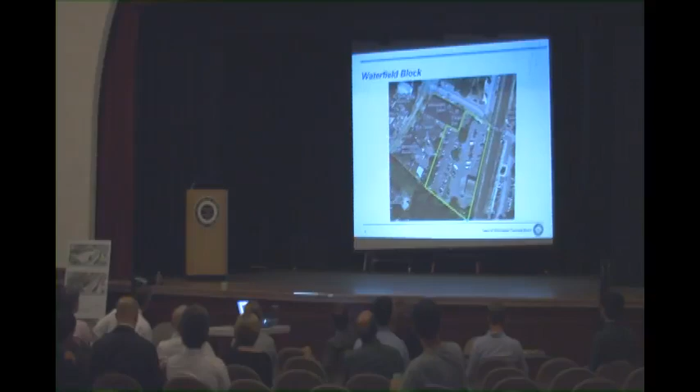So what we are talking about when we say the Waterfield block is the area between the commuter rail station, Waterfield Road, and Church Street. What's outlined in the solid yellow are the publicly owned parking lots. What's in the dotted line are the privately owned stores and properties there. So that's what we mean by the Waterfield block, talking about the whole area indiscriminately.

We have two questions that triggered the work. First, we looked at that area and said, what's the redevelopment potential of the area?

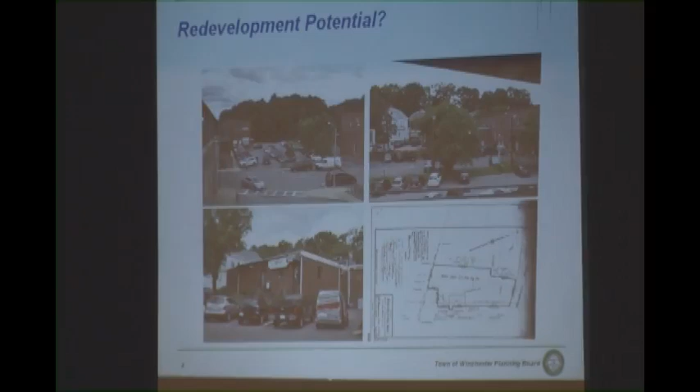As you can see from the shots, and I think most of you are quite familiar with the location, it's a fairly big space. It's been used as a railroad station and a parking lot for many years. On the bottom left it provides access to businesses, to D'Agostino's, the Patisserie, and others along there for their service trucks. But if you look in the upper right carefully, you'll notice it's not a terribly well-used space. There's a lot of unused space, a lot of inaccessible locations, and it's pretty underdeveloped. So if you're asking where in Winchester Town Center you can find a reasonably sizable parcel to think about redeveloping, this is certainly a target to begin with.

It's also an interesting site. Our town planner staff dug back into the records and found there's a 30-inch or so MWRA regional sewer that runs through there in the bottom right. The architects will point this out later on some of the drawings. So there's a very large sewer - you can't easily build directly on top of it.

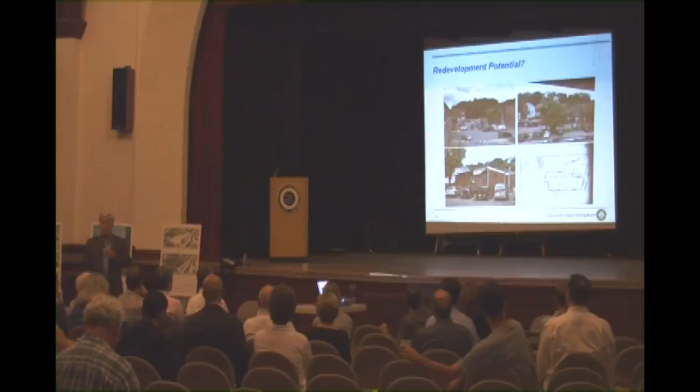So one question is, what's the redevelopment potential of this area? The second question we had was, what do we want in this area in relation to the reconstruction of the MBTA commuter rail station? The MBTA is committed to reconstructing the station - the platforms and ramps are sort of failing, and they're going to reconstruct both of those.

Their current plan is to reconstruct it pretty much as is, where it is - the ramps will be longer and at different angles. But the question they were asking us is, if we want to do anything else, want different access, or want to move the ramps, particularly in the Waterfield area, we need to tell them sooner rather than later.

The other thing that would make a difference is that the building in the lower right, which used to be the train station and now houses the Chamber of Commerce - I think David Anderson called it a marvelous example of mid-century architecture - is going to come down as part of the station reconstruction. And that will open up space there and change the configuration of the area.

So again, the question for us is, what's the redevelopment potential? And if we want to do anything - change access to the station, change anything there - we have to tell them sooner rather than later. So those two questions are driving part of tonight's discussion.

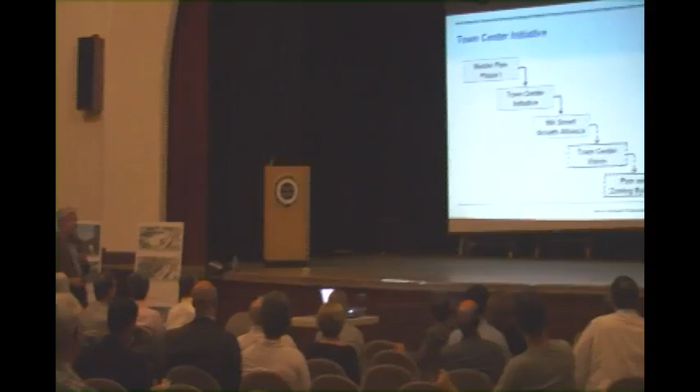A bit on how we got here: we did a phase one master plan that looked at the town a few years ago. One consistent theme we heard was that the town center needed some attention. We heard that the zoning was outdated, that the development process was Byzantine and time-consuming, that parking was a mess, and that floodplain litigation issues were inhibiting people from even thinking about developing. That triggered the Town Center Initiative.

We put together a series of efforts to take a look at the town center. We were fortunate to capture a technical assistance grant from the Massachusetts Smart Growth Alliance for their Great Neighborhoods program - Ian Anderson is here tonight to represent that. We've used that money over the last 6 to 9 months to look at some foundation issues: a review of the zoning, a review of the housing market in the area, and a review of the economics. So we put together a series of building blocks, and the next step was to ask, what is your vision for the town center?

How do you want the town center to change, if at all, in the future? And then translate that into a plan that changes the zoning bylaws. Right now, many things you might want to do cannot be done, because the zoning caps the height or makes it impossible, or requires a shopping mall of parking around any building to qualify for the parking standards.

So the question was, how are we going to get there? When we began looking at the whole problem, it felt intangible just to sit and look at a map of the town center and ask, what do you want to do? So we said, why don't we develop some case studies and look at specific blocks to give it a tangible sense of what we could do.

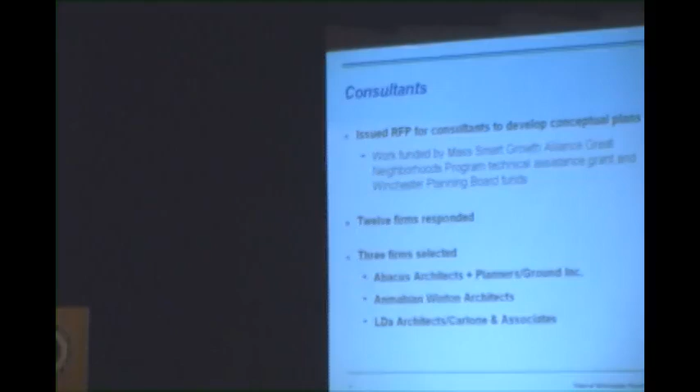So we put out an RFP a couple months ago for consultants to help us develop this. It was funded through the Great Neighborhoods Program technical assistance money and some of the planning board's funds. We had 12 firms respond, all quite qualified — we were lucky to get that response. We selected three; they're here tonight, including Abacus and LDa Architects. I'll introduce them shortly. What we did was give them something like this as the rules of the game.

We said, start with a blank slate as much as you can. There's no existing plan, and assume there are no zoning restrictions, since we'd basically rewrite the zoning at some point to do this. So don't be constrained by what's on the ground today.

Also, we don't have any specified development program for how much retail or housing you have to put in. We said you should consider a mix of uses — retail, restaurant, office, housing, public space, and so on. We basically told them to use their imagination, experience, and best professional judgment to put in what they think might work.

We asked them to make sure the concepts included the entire block, not just the town-owned portions — most of them looked at the entire area. We asked them to address access to the commuter rail station, which was one of the critical questions we had. We also had to be aware of and maintain clearance over the MWRA sewer line, since that would be a showstopper for building there.

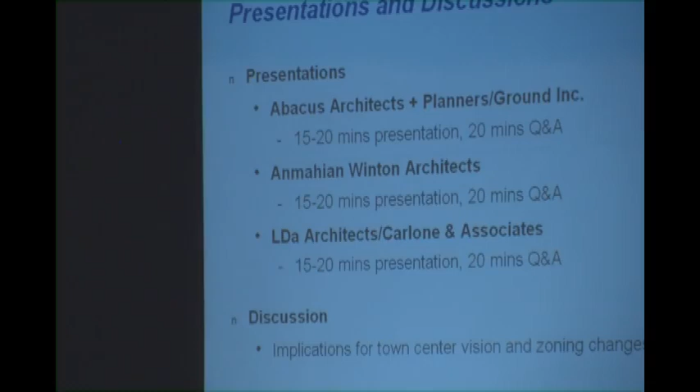So for this evening, we cleverly organized the presenters in alphabetical order. We're going to ask each one to work through their presentation, giving everybody 15 to 20 minutes, and leave about 20 minutes for you to ask them questions.

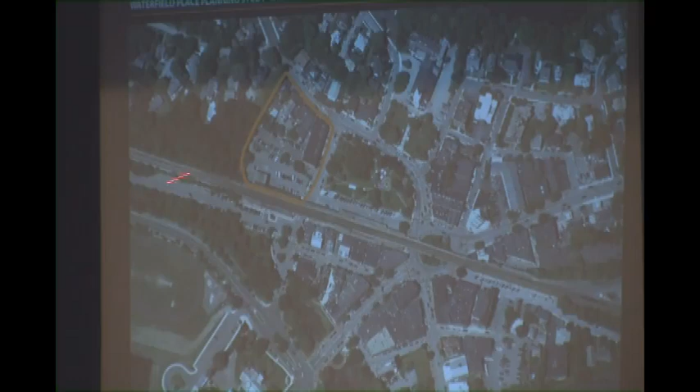Now I'm going to start out by disorienting everybody. Here's the site, oriented in a different way. Here are the railroad tracks on the bottom, here's the common, here's town center and the rotary, and so here's our site. Here's the playing field. All of our plan images will be in the same orientation, so if you can orient yourselves just a little bit.

Wonderful site, right between the residential neighborhood and the common, right near the town, right next to the train station, right plugged up against the Great Wall. So there's both challenges and opportunities. As we looked at the site, as Lance mentioned, it seems underutilized given how great this location is. There's some really nice stores and buildings here, but, you know, parking lot.

We looked at this with a broad brush and said, suppose all of these buildings disappeared, suppose we started with a blank slate. We need to bring back the retail, we need to bring back all the great things that are already there, but potentially in a new form. There are a couple of historic buildings there that could conceivably be saved, and we understand they're important to the town, but for the moment we said, let's see what happens when those are removed.

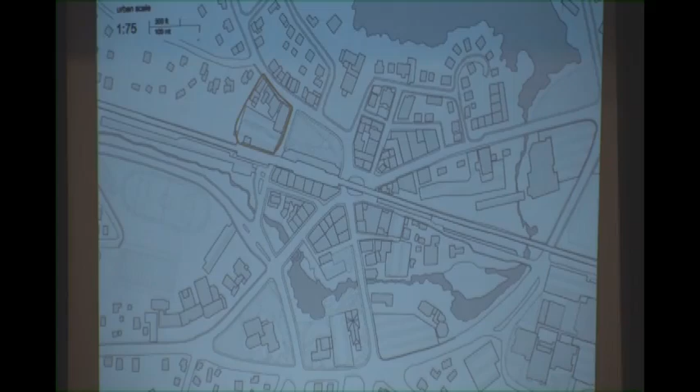And you can see this in the larger context of the river and the water. I'm going to turn this over to Shauna, who's going to talk about some of the broad issues that we wanted to deal with.

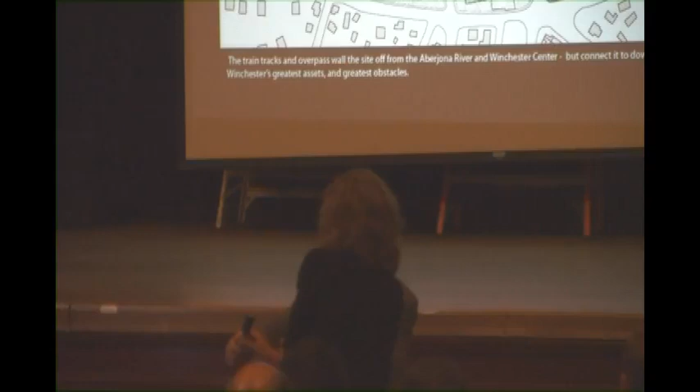As David mentioned, I'm really just going to go through a few broader ideas and observations about the town to set the framework that we started to look at this project from. The first is that it's a lovely, lovely downtown. I live in Arlington, actually, and spend quite a bit of time in the Fells, so I drive or ride through Winchester quite frequently. But one of the things that's always striking and somewhat confusing is it's a beautiful urban fabric, and then you hold your breath, dive underneath the wall, and on the other side, it's a beautiful urban fabric.

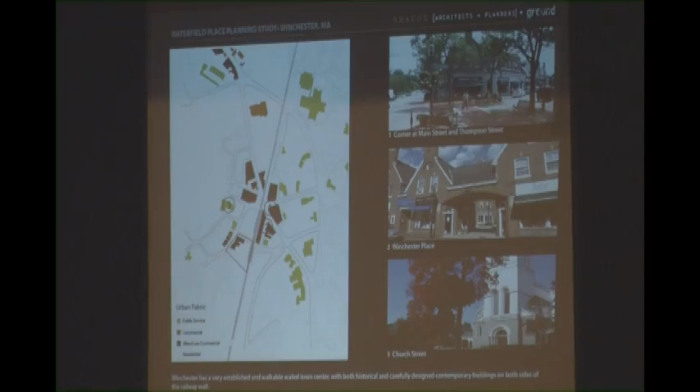One of the things that we looked at very closely are different ways to address that condition. There's clearly benefits to having the railway wall. Not only does it provide the opportunity for transit-oriented development, it allows people to get downtown or out of the city without having to use their cars, cuts down on vehicular traffic. But there's also other possibilities.

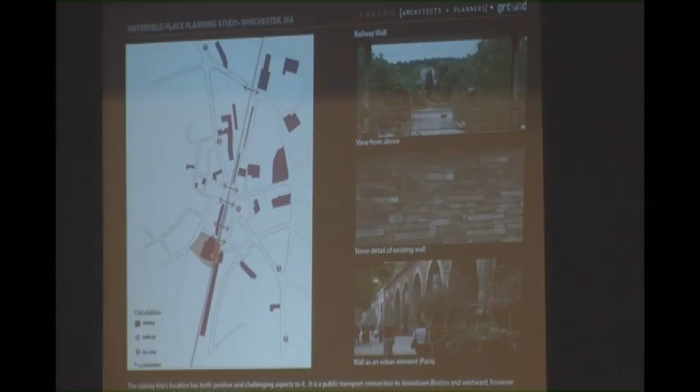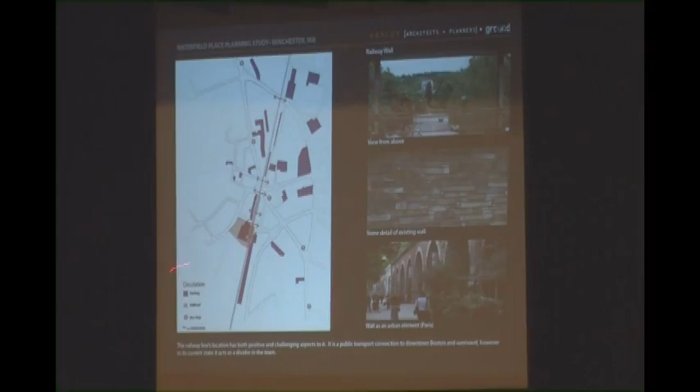The top slide is showing views from the railway platform itself. The second slide shows the exquisite quality of the stone of the project. On the bottom is a slide from another project, showing how infrastructure such as this, historic infrastructure, can really be integrated into the character of the town and the city. So both pros and cons, and as you can see with the arrows, the goal of this project is about connections to the larger realm, but primarily connections within the town itself.

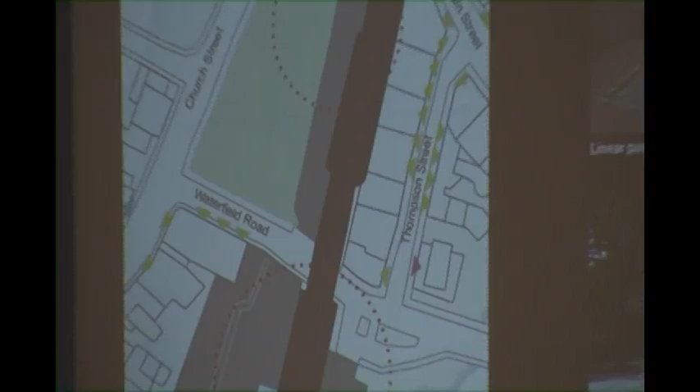Now I mentioned the pros and possibilities of the railway connection, but in a larger framework, the gap, the barrier that the wall creates is actually doubled in many instances by the location of the parking, making it kind of an untouchable zone. So instead of being this wide, it actually becomes this wide, and it becomes something that isn't really tied to the city.

So another of the big picture ideas we were looking at was ways to integrate this railway wall, which is actually an incredibly beautiful piece of infrastructure. How can we tie that into the city, into the town?

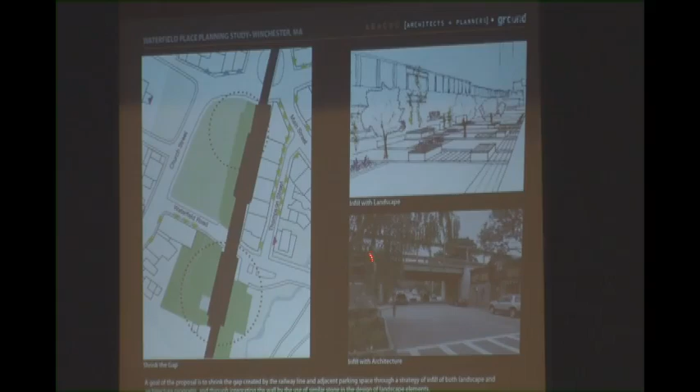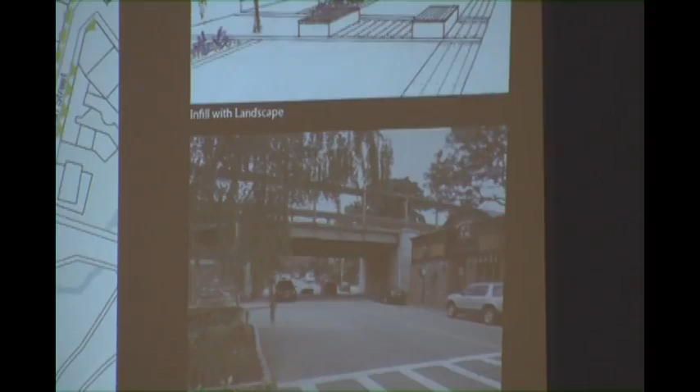In some cases, it's about bringing the architecture right up into a comfortable adjacency with the railway structure. But in other cases, it may be extending the landscape, for example extending the character of the common, and using that stone as a springboard for the character of the landscape, the benches or the paving, or even touches of stone cladding on the buildings being built around. So really trying to build upon something that could further enhance the quality of the town.

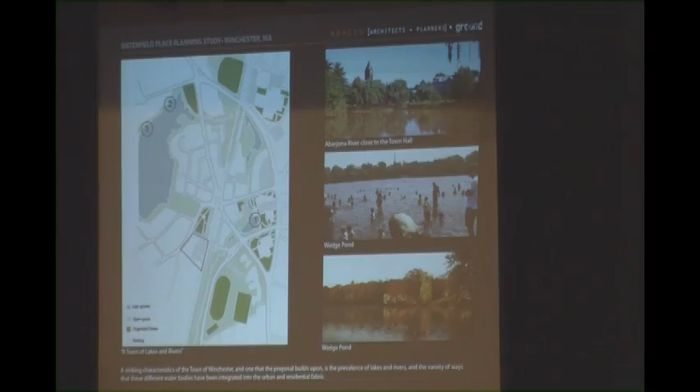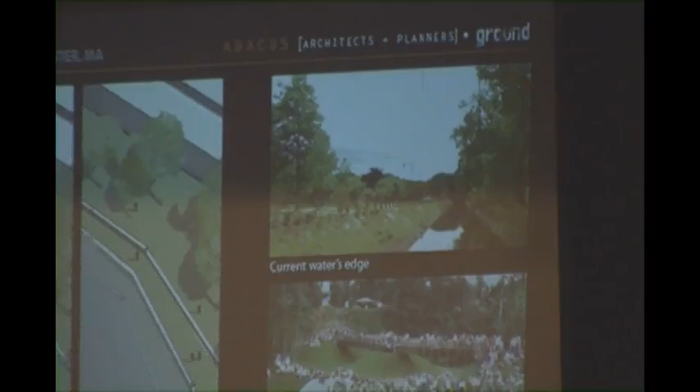And then the one other characteristic I wanted to mention about Winchester that I always find remarkable is that it really is a town of lakes and rivers, from a residential, recreational, and civic experience standpoint. I think there's a possibility of building upon that, not directly on our site, but the waterway across from our site, which right now is a channel. And when there are extreme water events, there's no place for that water to go.

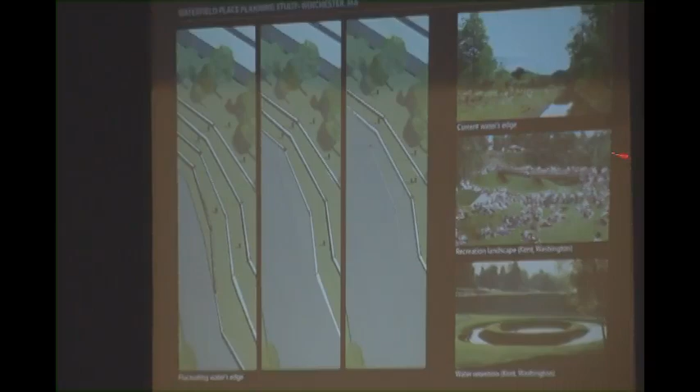So by potentially sculpting the edge of that, regrading it allows places for the water to expand, but also allows for very different characters when it's a dry condition or when the water needs to be absorbed. So with that introduction, I'll pass it back to David to continue the presentation.

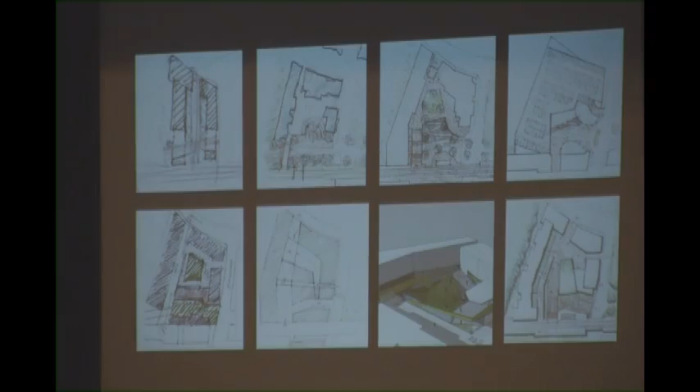To go from these broad conceptual ideas to a real design, we did a whole series of design studies, which I'm not going to get into. Some of you might have been at the previous presentation where we walked through all the kinds of investigations we looked at. For tonight, I'm just going to show a picture of all these different plans, and we developed a model so we can look at this in 3 dimensions.

This is quite an old model, and we've gotten way beyond it, but it gives us the opportunity to get a sense of what the spaces might look like, and then figure out how to deal with the site as it slopes down. You'll see the tracks on the bottom, Church Street on the top, and these numbers are the elevation of the site above sea level. Church Street is only a couple of feet below the level of the railroad tracks, even though it's 20 feet from the railroad tracks down to their base below.

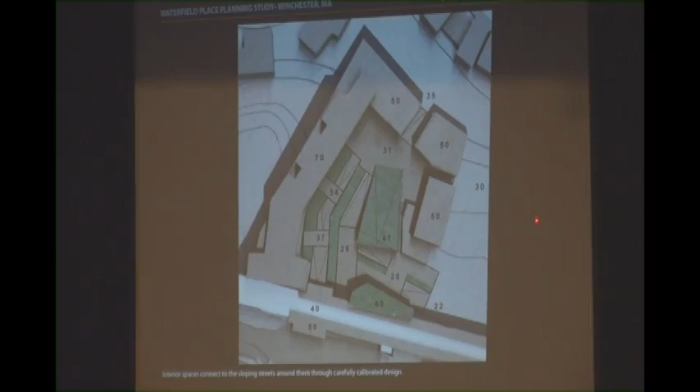So making a connection between Church Street and the railroad tracks without walking all the way downhill and all the way back up is one of the things we were looking at, along with making connections between the common on the right and our development proposal.

So here's a bird's eye view of where we're at with the development of the design. Here are the railroad tracks, and here's the common, and you can see we are proposing, as Shauna talked about, getting rid of some of the parking and asphalt and enlarging the common, and some redevelopment along the river so that the river is connected more to the town and its life.

Now in developing the property itself, we assumed the buildings were gone, and the first thing we did is wrap the whole site with buildings just the way most of Winchester is defined. This is a traditional way of doing downtown: you push buildings to the street, and you have retail around the bottom, so it's a wonderful shopping street. So in some ways, this along Church Street isn't that much different than the way it is now, the retail down below, and it's a little bit taller.

When you go around the corner to Waterfield Road, you have a building wall that forms a backdrop for the common. This is something we heard repeatedly, to build this out as a backdrop for the green space. What we've tried to do is make it sort of a continuous building, but the roofs go up and down, there are bays, the walls go in and out.

So we're not really pretending that this would be built over the course of 100 years, but we're suggesting the sort of qualities of incremental growth that makes this feel like a building that would be in a village as opposed to a big city.

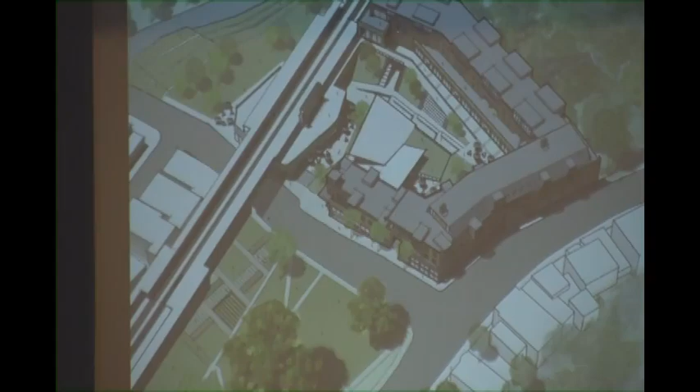So there's a cafe here, with a great big skylight on top of it — a symbol of the importance of the train station. I'll show some other images of this.

In the center we have a series of green spaces, and ringing this up above is residential — about 70 apartments right next to the train station.

This is sponsored by the Smart Growth Alliance. What's smart growth? It's about having people live near the center of town and near train stations, so you don't need to have a car.

We do, however, have parking underneath all of this — about 120 some parking spaces that disappear out of view. So if you look at this, here's the common on the left, and the corner of Waterfield Road and Church Street.

You see this sort of masonry buildings that push in and out, kind of an animated architecture, but still a backdrop. And that leads you down to the entry of the train station area.

So here's looking at the Great Wall, and here's the common — right now it's all asphalt parking, but we're suggesting it becomes green space. You're looking into the entry to this whole area.

So you go up a low incline, or go up the steps, to a cafe here, a little restaurant here, and move up through it. You can see further on — every step along the way, you can see your destination, the pathway that gets you up to the train station.

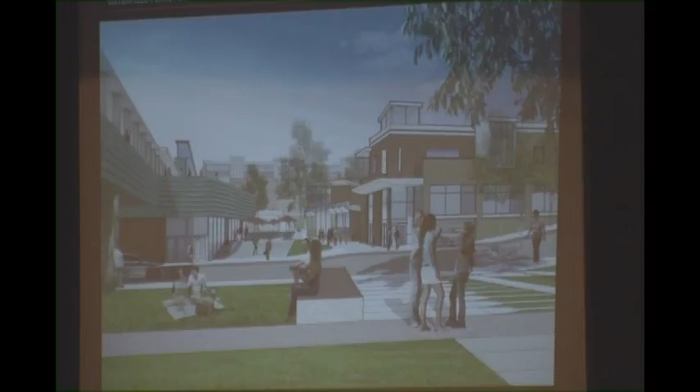So the red umbrellas in the back of the picture, you're standing in those umbrellas in the next image, looking to the right. So you're here, and then you turn, that corner right there is this corner right here.

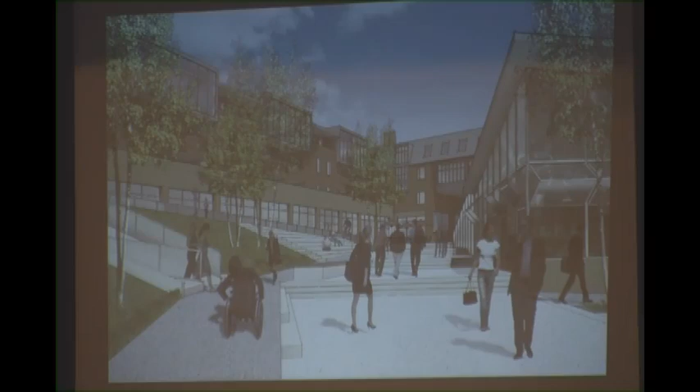And here's residential up above. This could be commercial space, it could be office space. This, we figured, was some sort of community space. It could be a cafe, a restaurant, farmers markets, movie night, or where schools present Christmas carols. Again, right near the train station, right near the common, right near where people are coming and going.

Then you keep going up, and you get to this point, and you turn around, and here's the incline that leads up to the train platform up here. Here's another cafe where you can get a cappuccino.

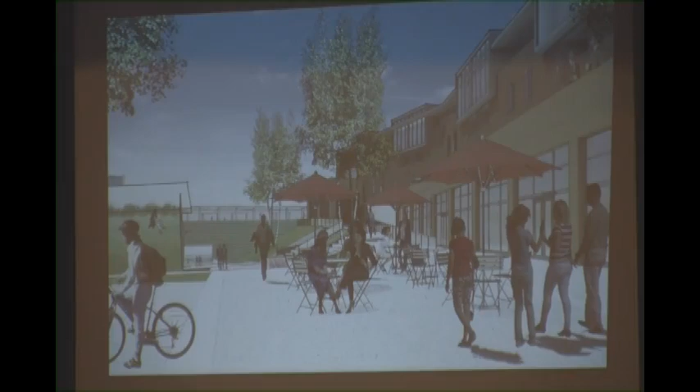Here's the residential up here, and the roof of the community space is covered with grass. So it's a green space, and you could have a musician playing down here, reclining on the grass. So it's both the roof of the building and a green space.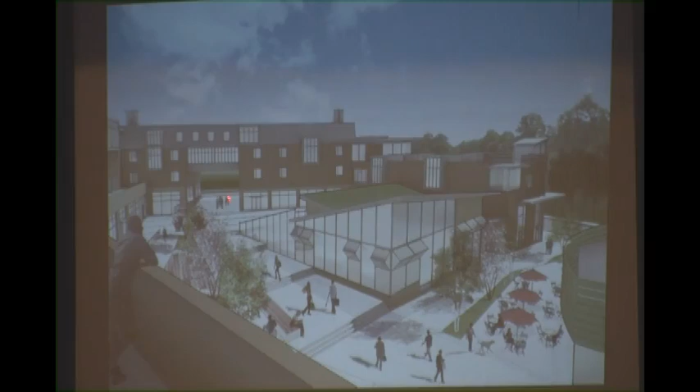And then if you live here, you look out over everything going on all around you. You look out to the common. Here's the passageway to Church Street, back down to the road, and right off to the right is the train station.

I'm going to quickly go through these. This is all built above parking, but because the site slopes down, the parking is really the same level as the parking is right now. All of the ramps and plazas you saw are built on top of that.

You have an entrance from near the common, and then here's the pathway and the loop of ramps and retail, restaurants, cafes, could be office space. As you move up, it's residential, and you're looking down on the roofs of the buildings, and you keep going up.

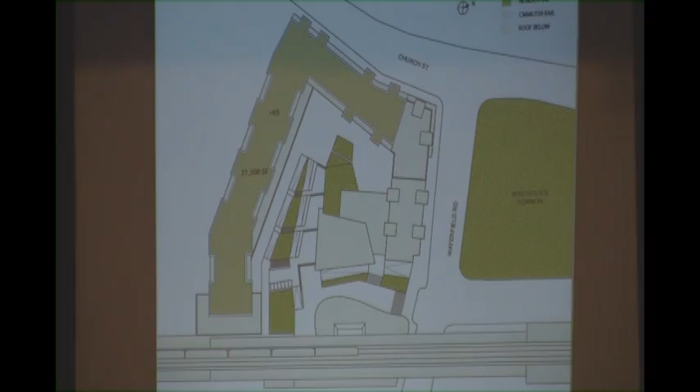As you go up, the ground steps up, so our building steps up, and you can see those pieces of building disappear. We drop down at the site, we rise up at the site.

Here's just another view with the train station in front, and that whole loop, the passageway—we walk from there and around there, we turned around, and then we viewed it from up there. This is another bird's eye view for orientation. I don't know if either of you have anything to add?

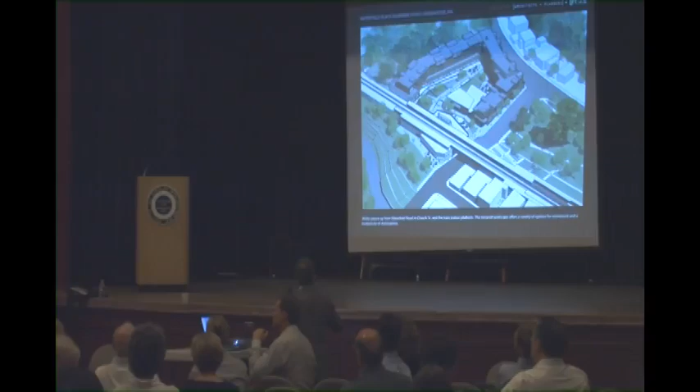Do you have a picture of that? It goes down from there, yeah. Straight in, that takes up the retail space right there.

So it's right here, yeah. There's retail here, because the site slopes, you enter the retail here, the retail goes there, there's a parking garage there, and then right around the corner, there's more retail.

So it's hidden away—we hate entrances to parking garages, but if you want to get into the parking garage, yeah. We had to keep it as low as possible, because if it's up high, then you're ramping down a full floor. Here, you're just ramping down a couple of feet.

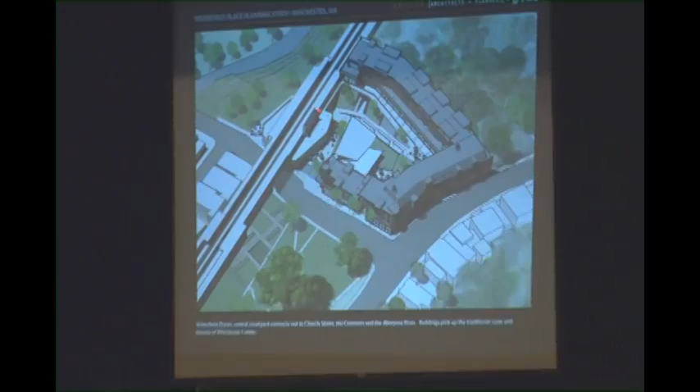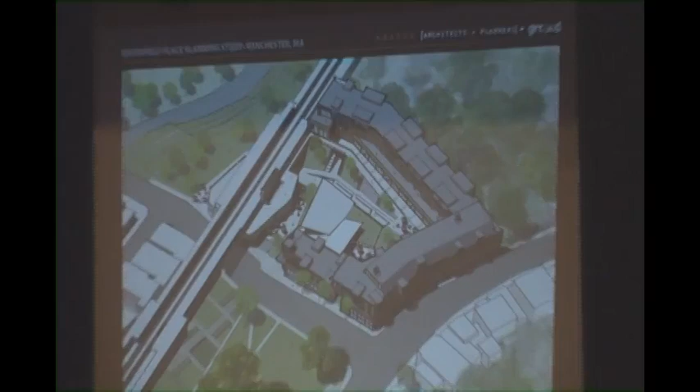Let me just add, in terms of the heights, this is with the parking level: 5 floors, 4 floors, 3 floors. Conceivably, we felt like you could add another floor because the one floor disappears underground. So that's sort of what we thought was appropriate density, and possibly a little higher in the back.

What's the net change in the parking availability in that area? For the public, that's how many spaces we're proposing. How many are there?

We're not really decreasing the number of parking in this project, and it's not that we're being nuts and bolts about solving it. We're trying to look at bigger picture visions that can assist in thinking about the development of downtown Winchester. Parking is obviously important for retailers, and we understand that. So whether we need to add an extra parking floor underneath, we could. I understand your concern, and we talked about it a lot, but we decided for this particular scope we wouldn't concern ourselves so much with the numbers. It's a very legitimate concern though.

I think the big takeaway is that parking could be thought of in a different way, such as structured underground parking garages. We've lost some parking when we expanded the common, but right now there's parking in this area, and I don't know how many spaces there are now. I think we have a small increase in on-site parking, because right now there's no parking underneath these buildings, and we're proposing a bunch of spaces here, though we're losing some spaces too. So I'd think we have maybe about 20 more on-site than we have now.

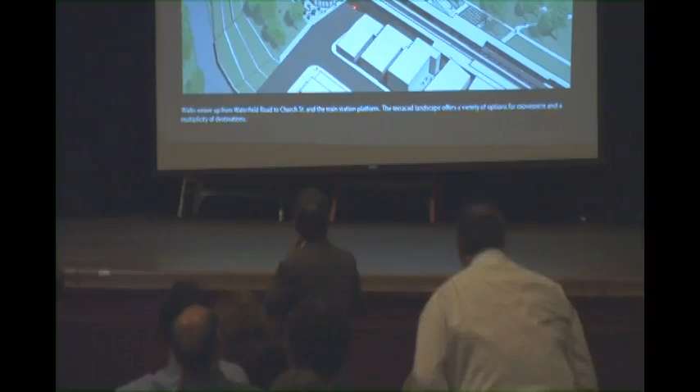The proposed potential of another cafe or something is drawn here, and then that's the location of the existing passage, which would be drawn larger to make more of a connection.

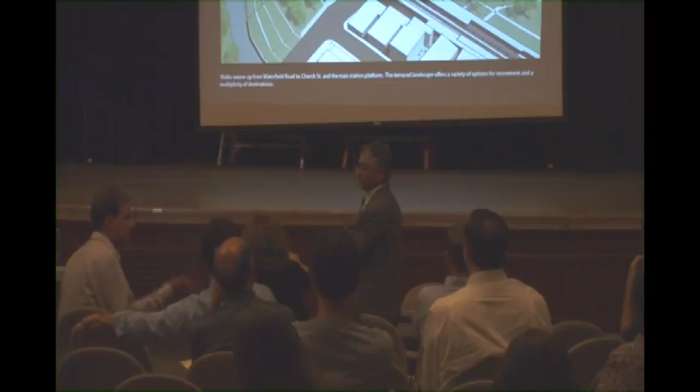So we're looking at 3 major connections through. One is the walkway on either side of the road. Then there's an existing one with potential to expand it. But the third connection is the proposed connection through the wall in this place, and that was the reason for the orientation of that gesture. As we talked about at the beginning, we're trying to look at connections joining the 2 sides of Winchester. I know the planning board has been talking about that third connection, so it's sort of on the agenda, whether it's in the budget or not, probably not.

We would probably have to maintain some sort of access road on the east side down to the ballfield playgrounds down there. But we explicitly told the designers and architects not to worry about the details. We're really focused on the massive use of spaces there. If you were ever to go forward with a project like this, there would be innumerable details to work out down there—again, it's about what the concepts are, what works, what doesn't, and what people like.

Steve Cohen: I noticed that you've also taken away the access road parking lot, and the road that gets you to the ballfield playground area. We're all in favor of it, but I suspect there's going to be resistance to that. This is about getting a concept on the table—you pay a price when you have that parking and road, because you disconnect the common and all of this from the river.

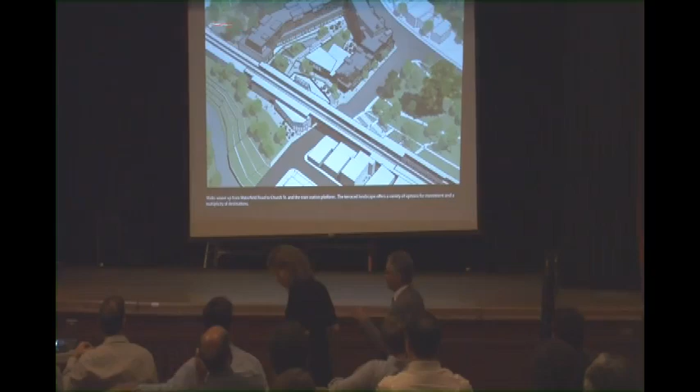Well, we originally were thinking it could be retail, but it's hard to get stores to survive here. Then we thought residential, but we felt like, wow, we're walking past. So what we figured is the perfect balance is to have office—an accountant, a lawyer, that kind of thing, an architect. We couldn't afford the rents, but ideally an architect there. It would be a great location, people coming and going, taking the train. That's what that glass represents.

And the spaces around the outside of the site, divided up by the passages through the site, into roughly 5,000 to 8,000 square foot pieces of a floor plate. So they would be really restaurant spaces—you could put restaurants all the way around, or any other kind of retail, on Church Street and Waterfield Road.

Their access is from the street, but then they can spill out into the courtyard, so like tonight, the restaurant you enter here, you go out and eat in the backyard. Not so great in the winter, but the spaces aren't so vast that if there weren't tables out there in the winter, it wouldn't still be a great place to be.

And the last meeting a month ago was great. We got a lot of good feedback on the square footages of retail and restaurants that the area really needed, and we really tried to take that into account in developing these plans.

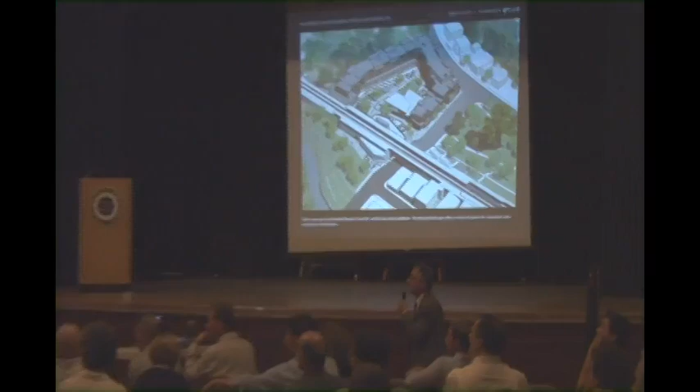Yeah, what's great in this shade in the summer isn't so good in the winter. The sun's coming from here, so this would get a lot of sun, this would get less. It's certainly an issue, we had a lot of discussions. There's often the question of what's right and wrong in relationship to the sun, and what's right and wrong in relationship to the street and everything else. There's a difficult balance in a location like this.

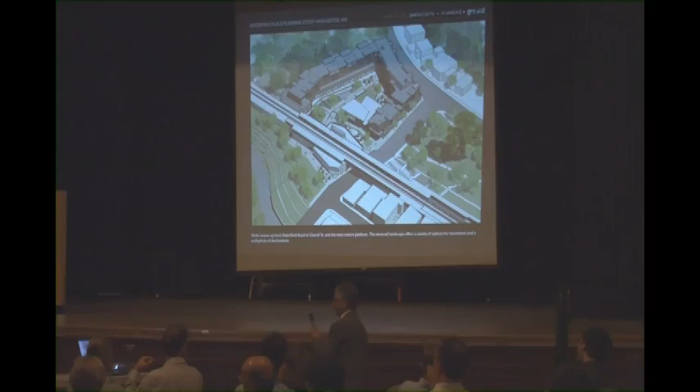I mentioned earlier, and I'll reinforce it: when we had 12 groups to select from, we purposely tried to select different groups—all extremely good architects and designers with different backgrounds, approaches, and styles. Not because we favor one design over another, but because we thought the most useful thing we could get from their expertise is to push our thinking in very different directions. So one of the things I know we're going to get out tonight is, looking at some of the materials, we're going to see very different approaches to this area. That's on purpose—again, we're not going to build it tomorrow. The question is how we use the space and what we want to think about, what works out there, and what guidelines it gives us for the future. Alex, do you think it works?

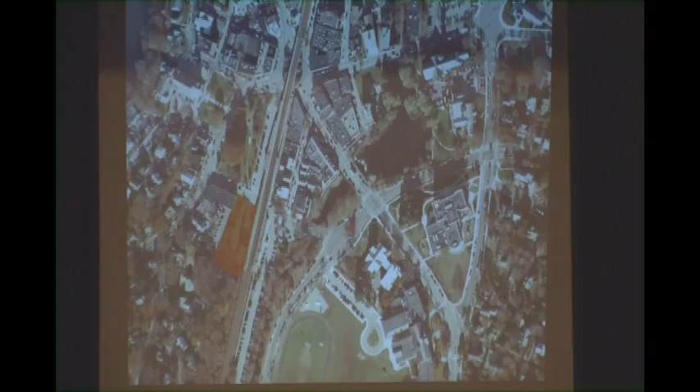So for us, one of the most important things were the edges, and how the town could re-engage those edges. So these are just analytical drawings—I'm going to zip through them.

Of course, everyone's familiar with the waterway in relation to the site, the green spaces, the size of the circulation that comes up to the viaduct, which is so much narrower, and of course the building footprints.

And then from a use perspective, we were interested in isolating residences, just looking at them from civic buildings to the commercial buildings. As you can see, they're sort of concentric and focusing in on the town center. So for us, looking at this, it seems intensely underutilized, as does our site, as does this portion.

And if these are how we can tie the site together, it was natural to think about what can be done. We examined the parking—obviously these parking spaces have nothing to do with our site, but they're all surface parking. Our sense was that surface parking is not a great way of utilizing some critical commercial space.

These are the existing thresholds, so to speak, that we were intrigued by, but are not very interesting at the moment. And then the sort of greenway that moves through the east side and the common. And what do we do with this?

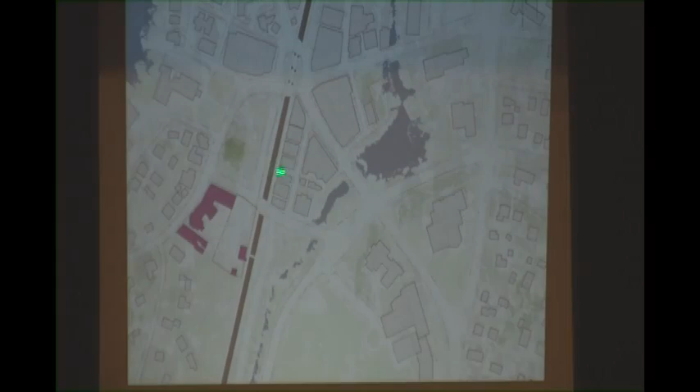So we looked at, like the previous project, just imagining removing these buildings. We also imagined affecting this portion right here and removing that to create a connection.

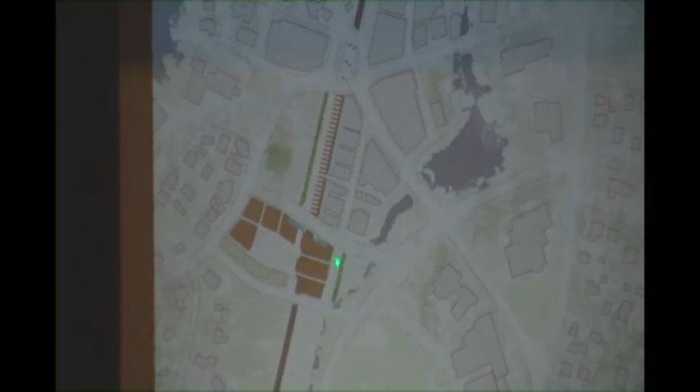In our case here, we were actually enamored of this depression, so we're following the contours down, allowing that to be a compressed, low-height block, 3, maybe 4 stories at most, to allow the masking of these by the trees to still occur because of what comes next with the prominence of the viaduct. It supports a larger idea.

So here we add a green space that would be semi-private, serving retail, potentially restaurants on the backside, other kinds of sales along the street, and the residences below. On levels above would be larger units on one side, with smaller work-live spaces along the south side, and a proposed connection engaged with the buildings, something glass that rises up into the viaduct, allowing a connection that doesn't take up valuable public space.

So the proposal ends up with, rather than what we started with, a bunch of penetrations that rely entirely on the quality of this piece of viaduct to create a threshold, a new urban landmark.

And there it is, the configuration of the buildings that pass through below, a park which has connections to the common but remains semi-public, semi-private, I should say, and then below with connections to the park beyond.

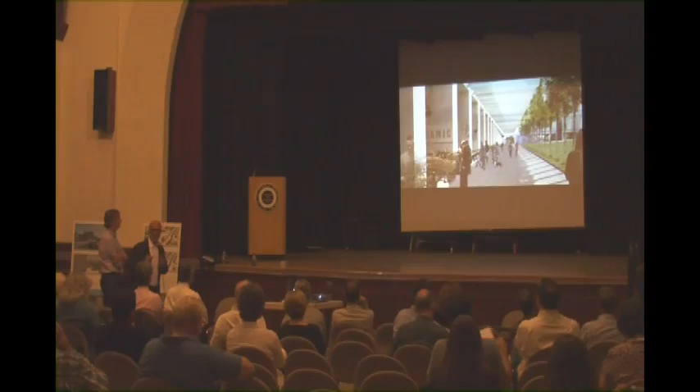This is an idea about a canopy that would protect it from weather there, and a continuation into the Waterfield block.

Again, this is just a notion about the courtyard, the semi-private courtyard with residences surrounding it, higher density on one side, lower density on the other, and how the viaduct might interact with that, and how the retail that would pass through it to the east would engage the viaduct.

And then finally, the idea of the viaduct enclosure as the thing to look at. That's why we've kept everything rather low level, so that it becomes a very serious and memorable landmark in the city. It's shaped in response to where a platform might begin and end.

It intersects and connects these portions of the site to one another. And even from this funny little line you see that opens and closes, it's meant to provide wayfinding methods, so you know where the exit is, because the roof and the glazing of the opening on top will get wider at that moment. So these are just ideas about possibilities. I'll stop there.

Questions or reactions?

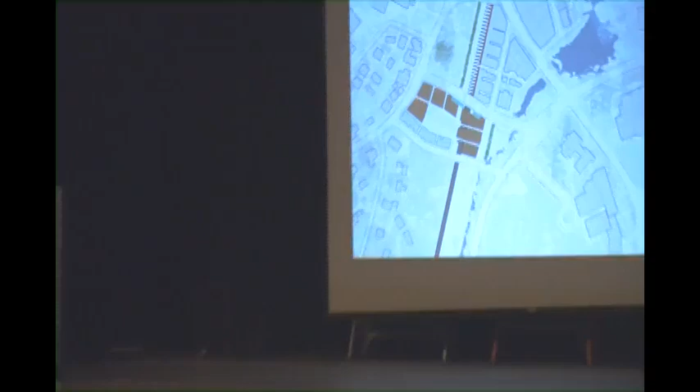Did your plan include anything about housing? This earlier area here is first level retail. This portion here and above is the proposal for high density housing. This whole block is essentially housing except the first level underneath these.

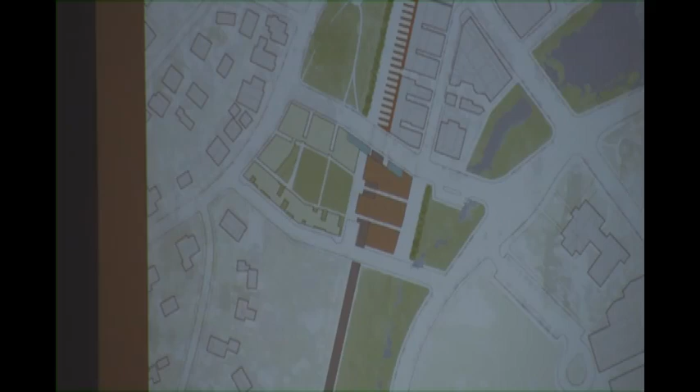So above might be one and two bedroom, maybe even three bedroom, but on this side, that band is assumed to be work, live, studio type apartments. The idea here is a graphic, but what it's really portraying is increasing the density and mixing the demographics so that it allows younger people to also live in Winchester and commute into Boston, etc.

Do you think at all about ways to expose the central part that's hidden from the street? And I'm guessing you have all the buildings. This? Yeah, I mean, it really plays off of what exists here now, but without the frustration of termination.

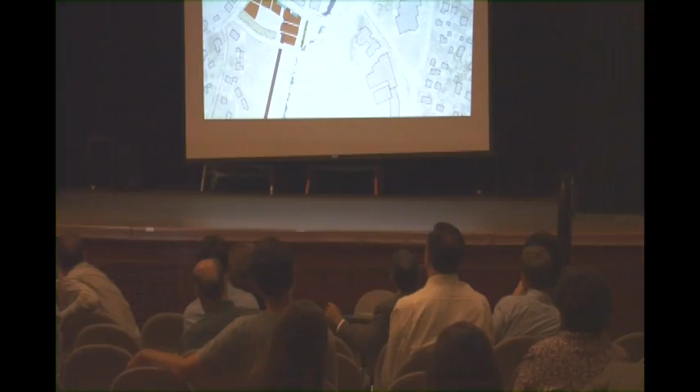So you can see what we've done here is while it appears to be a singular block, at least on the first couple of levels, the idea is that they're really cut through, so that there's a visual connection. In fact, from here we're trying to also align these to make visual connections all the way across to other parts of the park as well, so that it's really kind of porous. These are the kinds of things that would be a subject of design.

Gauging exactly how wide those would be to achieve that and what their functions are. The reason we showed this as being narrow came from this idea, but then when we had a court inside, the idea was it becomes a great place as a semi-public space where if you have kids playing that need to be watched, for young families, it's separate from other public places, somewhat protected, so to speak.

David Anderson. I really like the way you jump—

So the viaduct is one cut through, the streets are another level, the continuation of pedestrian streets, and then the small alleys between buildings that connect the courtyard. So it's a common theme that continues to scale down, but it's always about public space as it narrows to private space. I love that.

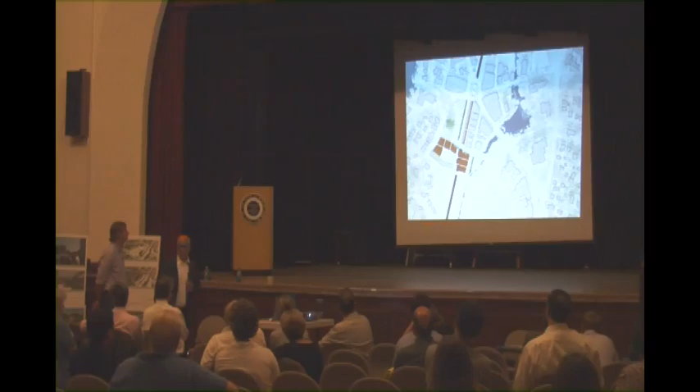So you seem to make the train line some sort of object, and you can see through the street. But how do you access it? What should be the idea of accessing the street? It seems here that it's sort of accessing the platform level. This right here.

Let me see if I can find—

I can't really see it. See this over here?

So these are glazed retail, and then this is an enclosed stair that goes up to an elevator. Rather than doing a ramp, which would require creating a landscape with a language of ramps, recreating a ramping system going up wasn't in the language of what we're doing. So we just created a stair and elevator as a way of getting up there.

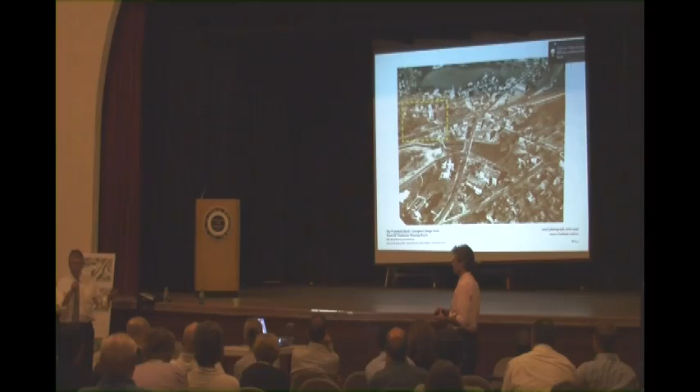What's interesting is there's a blow-up of the old railroad station, which was at grade, the railroad tracks at grade, and Waterfield Street does not go through. That's why Laraway Street is there. There are trees along the tracks and along Laraway Street on the other side. On the other side of what is now Waterfield, there was a turnabout, so this was the formal drop-off to walk across the tracks or over the bridge to the station.

So it was much more of a traditional village kind of setup. I assume in the early 60s, late 50s, that changed, but this was the old station—it had a lot of charm. There was a place to get out of the weather. It probably had a men's room and a women's room, and those days are gone.

Now, so we look for inspiration. We're urban design architects. To us, this should look like Winchester. Winchester has an image—doesn't mean it can't change, but that it should feel right.

And so we look for examples. This is a wonderful community called Forest Hills Gardens. It was built from 1906 to 1922, the majority of it was. It was a railroad town. This is the new railroad at the time. Right there's the station—it's right at the heart of the town square.

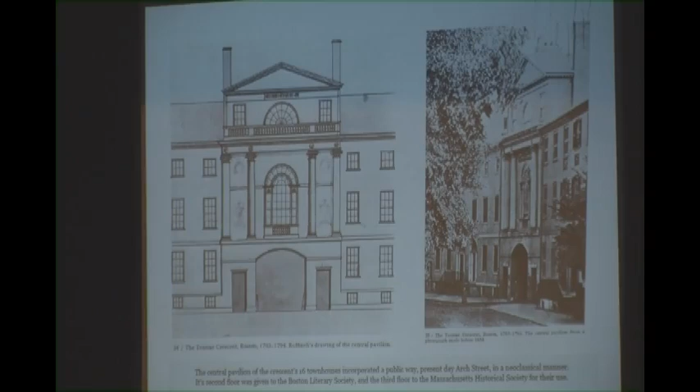We had other thoughts. One is, we know although there are no kids here tonight, you love children in this town. We came to the market affair a few weekends ago and saw all the kids and people in the common. It was quite wonderful.

This axis that's been discussed, continuing the Locatelli block, or Winchester Terrace, I think it was called, we totally agree with, but what we're going to propose is that there be a rings-like fountain

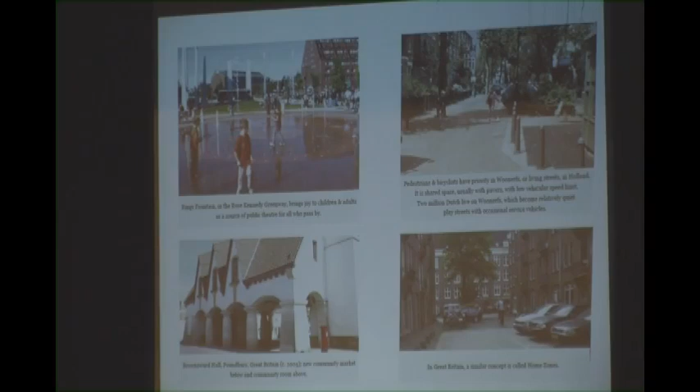as you come through the wall at that portion of the common, so it becomes an activity that everybody loves. Frankly, on the weekend, people, if they're in the downtown, they tend to shop, they tend to go to the library, they tend to go to the post office. The kids will bring them downtown.

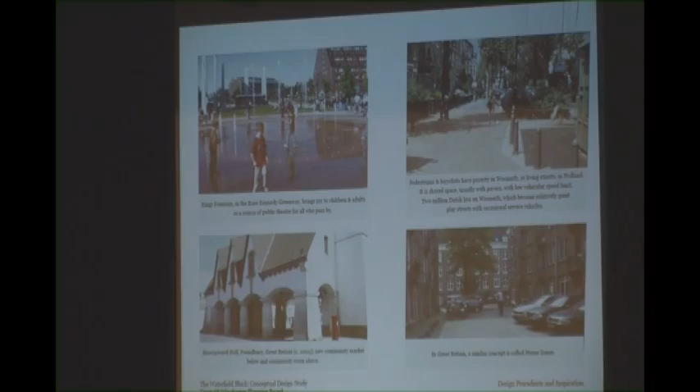Also, there's a term called Woonerf. It's Dutch. If you have any Dutch friends, you can say Woonerf and they'll think you speak Dutch. Woonerf is a living street. In Holland, 2 million people live on living streets. Living streets are for people and bicycles, priority one. Cars and service vehicles can go on it, but they have to go at a very slow speed, 5-10 miles per hour even. The streets tend to be not very big, that's a Woonerf in the upper right corner. Kids are playing, you see the bollards.

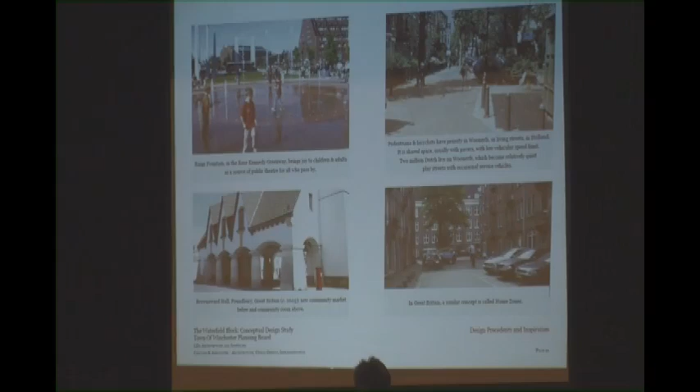This is one in England that's less graceful. And this is a new public market community room, believe it or not. It's in a new town, that good old Prince Charles, who we happen to know personally, who'd be glad to do something here, I'm sure. No, we don't know him personally, but this is a new marketplace building that was built as an integral part of the town center. So this notion of a community room above a market, an archway, was in our mind.

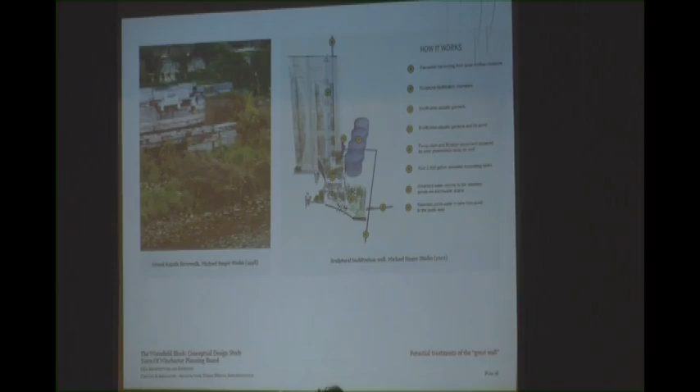So these are views of the station area, you already know that. This is a proposal for treating walls that Michael Singer did, and I'm going to let Peter mention a little bit about Michael. I'll just mention briefly, this is a colleague of ours, Michael Singer, an artist, an environmental interventionist I would say, who's done a number of projects where walls are treated as kind of giant biofiltration projects.

They can become kind of living walls. Some of them are planted, some are sculptural, but it's a way of addressing the fabric of the wall in a way that inspires people and actually treats the rainwater coming off the platform at the same time, potentially. So getting the T to agree that even longer term, something else could happen beyond this project is absolutely key, as well as doing it now.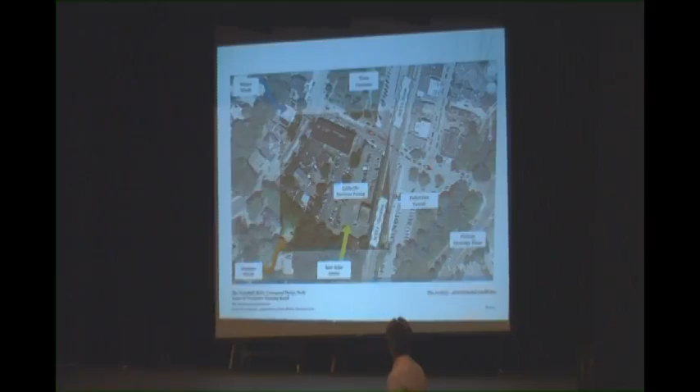I'm not going to go through the analysis, you've all done that, but let me add one thing. The best solar view is from the private forest. This is south going north. If you do put a bar building here, it will cast quite a few shadows.

The rest is pretty self-explanatory. You already know the station is dilapidated, but the underpass in particular is very depressing. And whatever you do at the station, breaking down that wall and making it more a part of the city is key.

Widening the sidewalk, even doubling it from 6 feet 2 inches to 12 feet 4 inches, would make a huge difference. Lighting, ceiling treatment, that's part of the station design. There are some great active retail edges, as I said earlier.

We propose not disturbing that. Everybody has talked about this parking lot and how inappropriate it is. We don't suggest taking out the parking, although I'd love to. We suggest modifying the street and making it parallel parking.

The T-station, as others have shown and we'll show you in a moment, instead of these ramps, there's no reason why there needs to be ramps on both ends. At this end, the more town-oriented end where more activity is, it could be stairs enclosed with glass, which I'll get to in a moment, and an elevator.

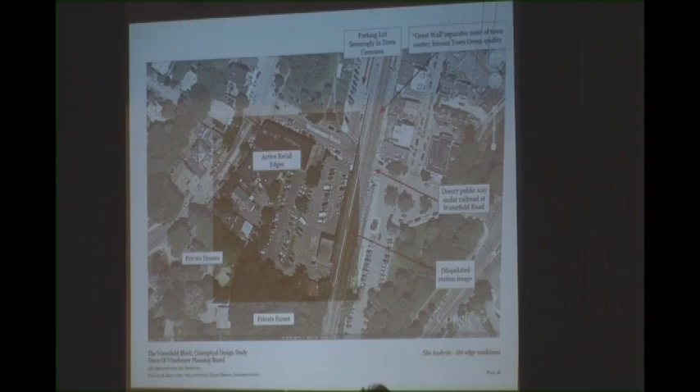They know lawyers. So there's the parking lot as it exists. Peter, did you want to add something? My brother-in-law is a real estate lawyer, if you're interested. No, he's not. I'm kidding.

But there's the parking lot. Our proposal is this. It's hard to read, I know you'll see a first floor plan in a moment, but these are the existing buildings. We've added 1.5 floors on it.

This is the new T-station. It's enclosed. Even the upper portion is partially enclosed for weather protection as well as blocking the sound for all these properties. We've created two public spaces, one private space.

This is the easement. There's an opening under the building that you'll see in a moment, and then there's a second little courtyard. So these properties have a handsome courtyard to look out of. One way to spur redevelopment of adjacent sites is you upgrade their views.

If it's at all possible, you make a place. It could be a place where a restaurant in those buildings comes out. In fact, the French pastry shop could have outdoor eating, and an Italian restaurant overlooking this waterfield - that is a restaurant, that is a fountain.

This is the Waterfield block. There is the spray fountain right there. And the private courtyard is for the new apartment building.

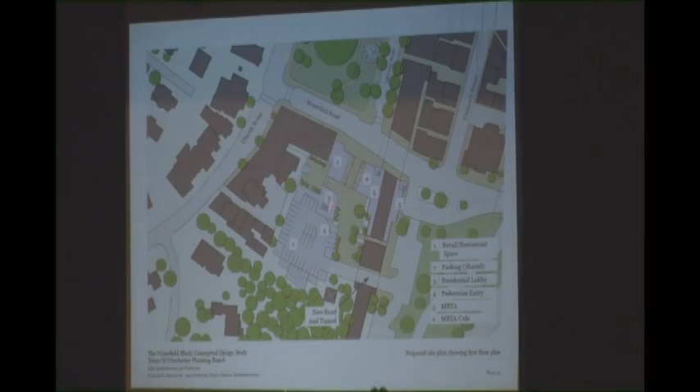We've preserved these buildings as they are. We were told that this owner might be interested in adding additional floors. So this is what we heard, and that's what we worked with. Am I missing it? Oh, this is the entry for pedestrians to get into the public parking at that point. It's right at the end of this tunnel and right at the access with that underpass right there.

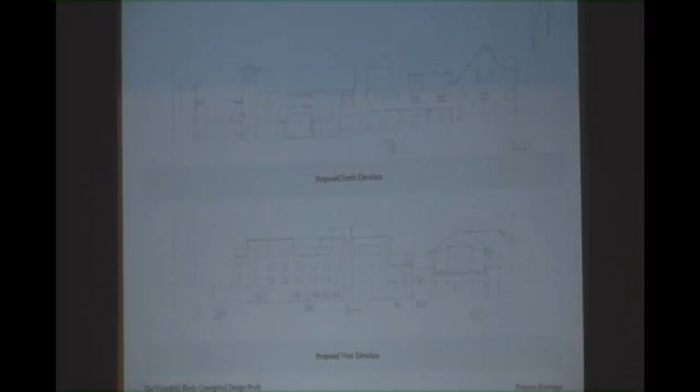You can't read these, so they're a mystery to you, but these are the evolution of the drawings, and I was going to explain a little more about the generation of the plans. We call these ghost drawings, I don't know if you know why. You can't read that either, but you'll see better drawings in a moment. These were the process drawings we were asked to include.

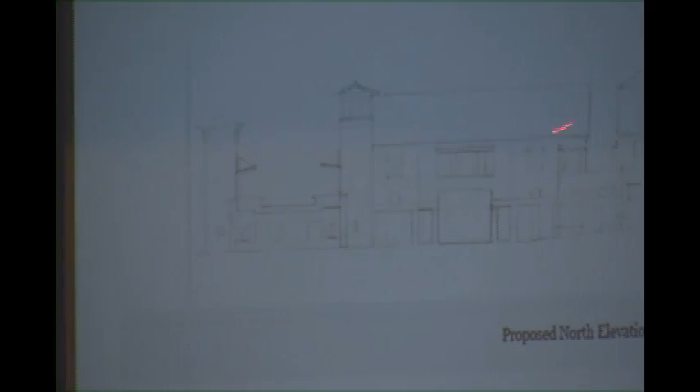Here is the continuation of the easement as a raised archway, different than Bulfinch. There's the community room or community rooms. There is the tower that incorporates the elevator to the MBTA, the elevator to the community room, and could continue up to the attic floor as well. This is the elevator coming down.

They're purposely different. This is the existing retail. If you know the building, the Sarabian building, this is STEM over here, Monet over there. This is the existing storefronts, actually. This we've altered a bit to make it stronger, and that, of course, has been added on top.

I'll let Peter continue with drawings that'll make the explanation a little clearer. Thank you, thank you. I get to do the pretty pictures.

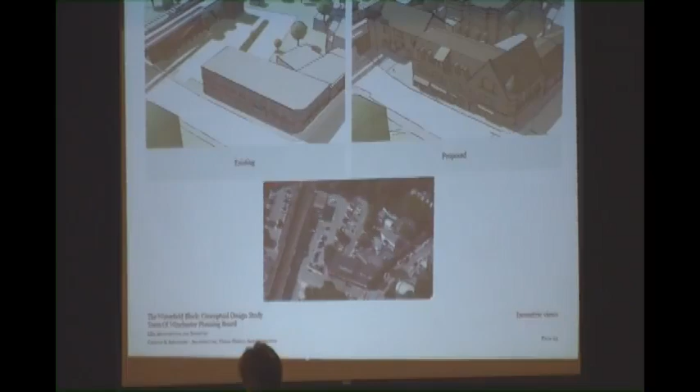So we've just got a few, I don't want to take too much time, a few views. We did a study model like the other teams, and this is the character of ours, essentially drawing from the character of much of what exists in Winchester.

So this is a view looking from the southwest, or the north, I can't remember which, northwest. You can see the volume we've built up over the existing corner, and then this bridge building, which sort of sets back and becomes a bit of a plaza. The existing's on the left, proposed on the right.

Going to the opposite corner, now this is less developed, but it's the apartment building with 2 levels of parking below and a private courtyard. This could obviously be something a little more contemporary once you're inside the court.

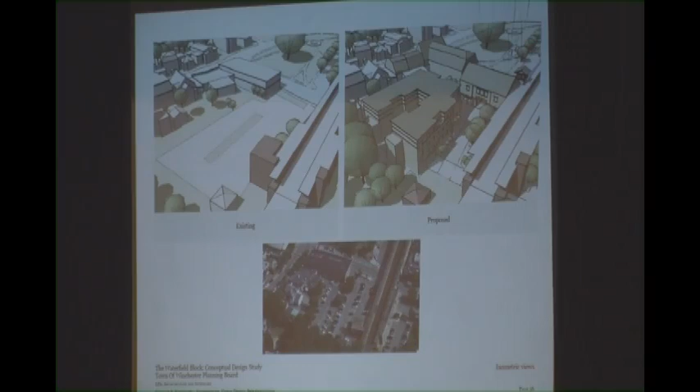Here we are standing inside that court, looking back out toward Waterfield. So this is the sort of living street concept. There aren't any cars in this view, but it would be pedestrian, bikes, shared.

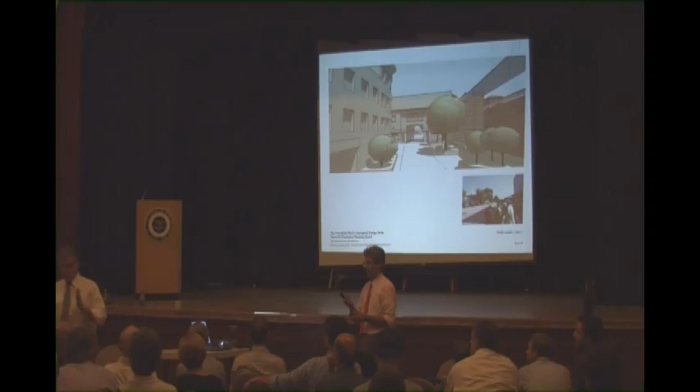There will be trash trucks, fire engines, taxis coming by. That one-off could serve that. As you come into the garage, before you go into the garage, you make it right into the one-off. We've designed it so the trash truck fits there. In 5 minutes, it's gone. The same with service delivery for the adjoining buildings.

Right now, the parking lot is used by the adjacent buildings for their service deliveries. It's not going to be immediately adjacent to the building, but there will be spaces, and there are in the plan—you can look at it later for that. So we try to incorporate the needs of the neighbors as well as improve the view. The building is the same distance away from the viaduct as Thompson Street buildings are.

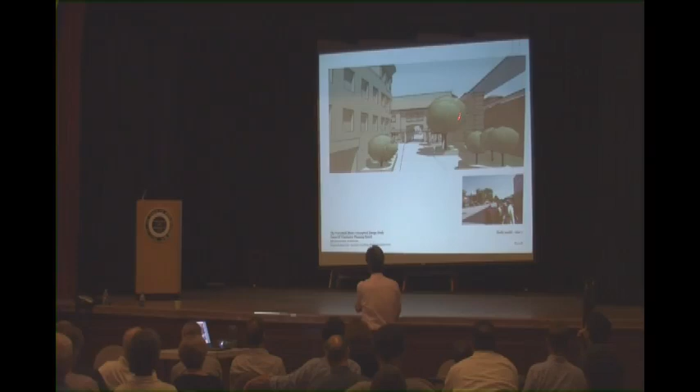That's right. Another thing, we're not differentiating materials, but the idea is that the cafe around the MBTA would be mostly glass. Some of the other teams had some wonderful ideas about how to address that wall, and maybe glazing the whole cafe and elevator stair sequence would be actually pretty interesting.

And there's a kind of overview of the scheme. So you can see we're trying to draw from different architectural characters and styles in the town, really trying to densify that site. The buildings at the corner are 2.5 stories high. We might want it to go a little higher, but that seemed what Winchester was.

So here's a little animation, going from the commons. Now you're sort of traveling down along the wall, and this is what it might feel like to go through this arched building into that courtyard. And then you can see the scale in there. This is again that sort of living street concept, and then turning around, this would be the glazed-in cafe, which doesn't look like glass. Looking back onto Waterfield Street, and then there's the private courtyard there.

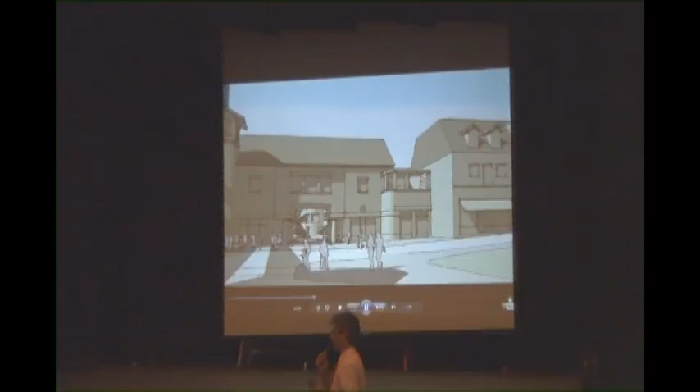So I could play it again. It was pretty fast, I'll play it one more time. How about that? So that's our presentation. There's the rain fountain that looks like ice, but really meant to be water. It's moving a little fast—I think it's making me move. So here, this gives the impression of a railroad station image, and that was important to us.

There's the pedestrian entry on the right, more right, to the parking garage. There's the existing passage underneath—that's the back of a cafe. And that actually leads to the little courtyard that combines the three buildings at that corner.

So we're, I think, ready to take any comments, thoughts. All three are very different, and I think that's been very interesting for us, I have to say. We rarely get that opportunity.

Questions, ideas, responses? Sir. You mentioned that technically... what would you do if you're talking about the other end of the MBTA?

I might get myself in trouble here, but I think the ramps along the common and in the alley does not serve Winchester well, especially the alley and the commons. I think the ramp should be on the other end of the rotary, where the parking lot is, and you could do something similar to this. And I know people say you can't drop off in a rotary, but there could be a roundabout street, much like's been proposed on this site, to get traffic around at a drop-off, where that parking lot now exists, on the east side, northeast side of the rotary. Oh yes, okay, I don't know the name. Great idea.

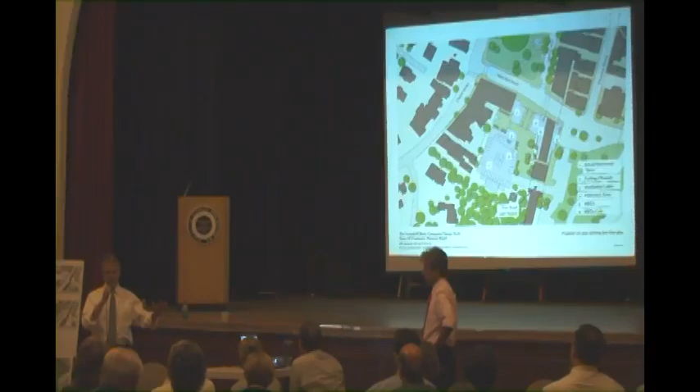One of the things we were unsure of is, well, what we show is one floor of parking at grade, one floor down. There are problems going down. On the other hand, once that area—we know the area can flood. When it floods, you're not going to get in there anyway, so we did put it down. Now, if you go up, you can get more parking, but at what point are you separating the housing from the ground and the courtyard from the grounds? What we've shown is one level above for parking and three levels of housing. You can go four levels of housing.

The new building shows 36 to 40 units depending on the size. The 36 are at 1,200 square feet, which the board had asked for a range of size, so assuming it's in the order of 800 to 1,200, that's 42. The buildings above Mr. Sarabian's storefronts, if one converted that, it's another—I believe it was 15 to 18, depending on the size. So for a total, it's in the order of 50. If you did additional work, went additional heights, that'd be different. It'd be higher, obviously. We limited it to what we thought might be feasible.

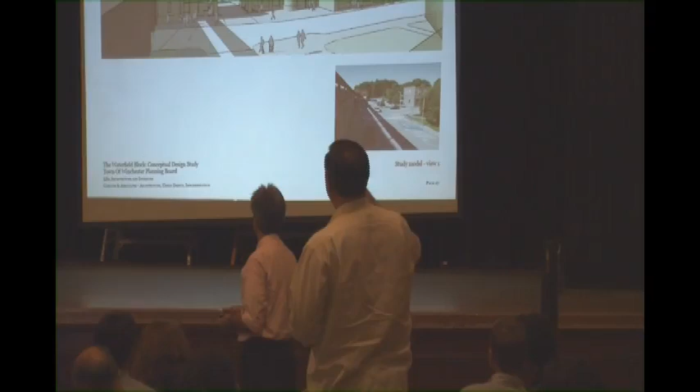I like the concept presented by a few of you, having a destination, a focal point, something visual that's interesting. So in your presentation the towers caught my eye for that reason. As a photographer, the idea of a 3 or 4 story tower that's open and available to the public with a 360-degree view, assuming it's above the railroad tracks, and you get a good picture all the way around—I think that's really interesting.

We did that for you.

Questions, ideas, reactions?

Okay, I'm going to open the floor now to all three design teams and to everybody here tonight. I'd like to sit back and say we asked three very qualified teams, each with a different approach and perspective, to take a look at this and come up with different ideas about how to organize it. What I'd like to ask is that people back off and say, what are the common elements, what pieces of this do you like?

We saw multiple different uses, housing. Right now it's very difficult to do that. Some of the obvious changes we have to make are to allow housing by right. Retail is kept in place. Most of them kept some sort of parking limitation. We have to downsize the parking requirements so developers can afford to build it, and make some sort of night use for residents, day use for employees.

I'd like to get people's reaction, the design team's reaction, to the general set of concepts they saw. I don't think it's necessary to defend your own particular one, but I'd like to get back to the question of if we as a town reset the zoning and review rules for developing this area, what are the basic outlines of what we'd like to see here, and therefore what would we like to put in the zoning to make something like one of these feasible in the future. So I'll open it up to anyone's question of what they liked, what they didn't like across all three, what they thought about it, and should we go ahead and rezone this area to do something different, or should we just leave it as it is?